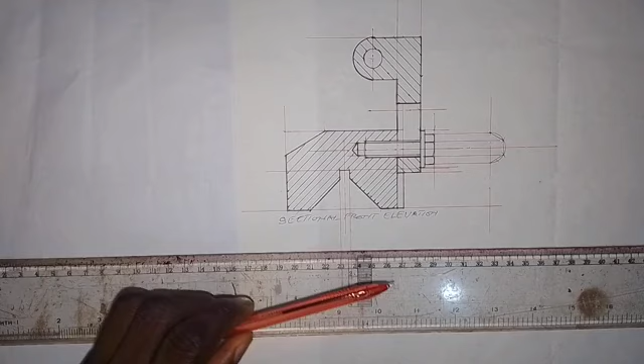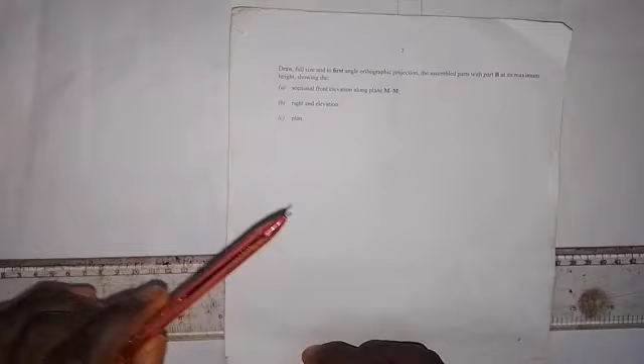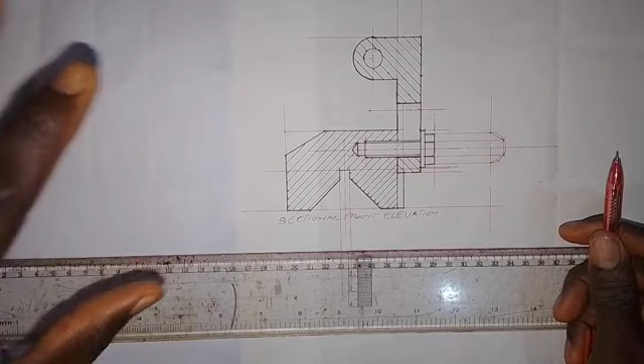Here we're going to be working on the construction of the right end elevation, as we have worked on the sectional front elevation in this mechanical drawing exercise. We are given the question asking us to draw the sectional front elevation along plane MM, which we have done. Now we want to work on the right end elevation, and we'll have another video for the plan. We'll place the right end elevation on the left side of the front elevation, as we are drawing the views in first angle orthographic projection.

So looking at the object in this direction, what we see here is what we are going to produce. This is how it goes, so let's work this way.

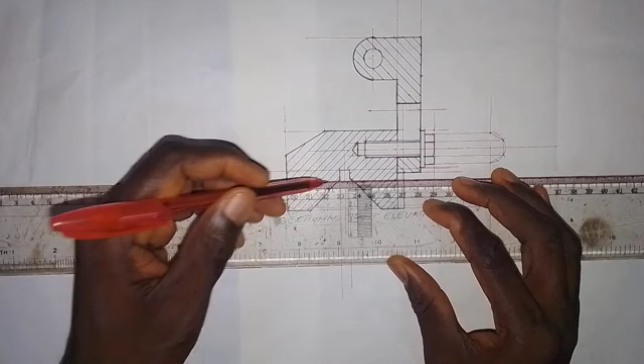First we are going to extend this horizontal line. Then I will come to this point here and draw a horizontal line from here to this side. Then I will come to this point up here and draw a horizontal line from here to this side. Then coming to this point, I will draw a horizontal line from here, and lastly at this point here I will draw a horizontal line.

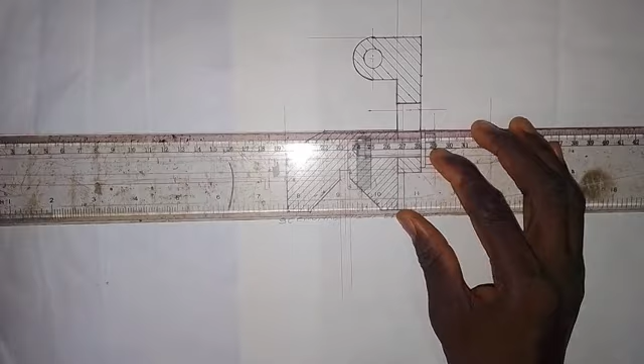Let's start first of all by getting the part of this particular component, before we add both the washer and also the adjustable vertical slide. So let's work on this part first.

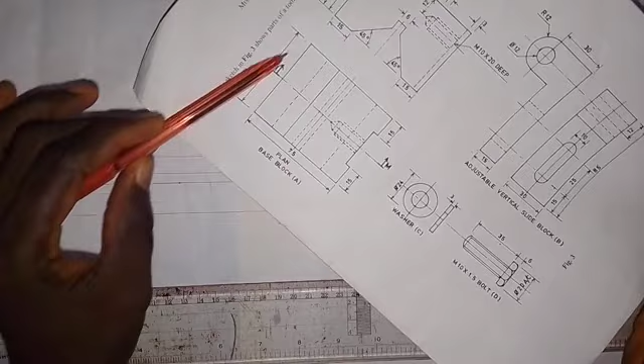Now, what is the length on the end elevation? Let's come to the plan here. The distance from here to here is 60 millimeters, so that's the distance we are going to make use of.

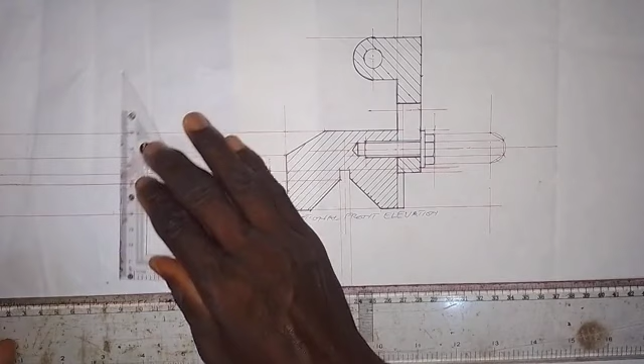I'm going to draw a vertical line moving away a little bit, so I will draw a vertical line here going down. Then I will come here and take a measurement of 60 millimeters, so this is 60 millimeters here. Then I'm going to draw another vertical line here also.

Alright, so with what we have here now, when I'm looking at it in this direction, I'm not going to see this - I will see a line at this point, just a straight line, and that is the line we have drawn here. So this line now, we make it a thick line from here to this end here.

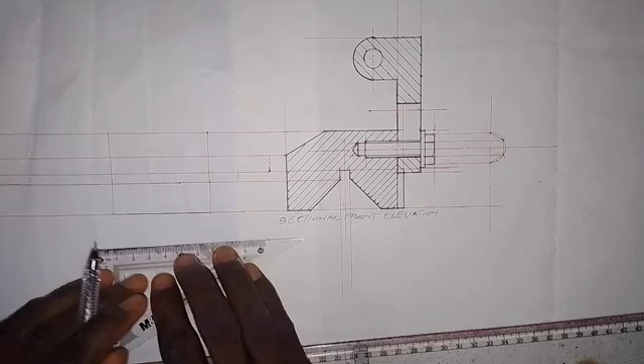Then a line at this point will be hidden from me, so we are going to make this line a short dashes line, like this. Short dashes line is used for hidden detail, so that will be hidden. And at this point, this will also be hidden from me, so we also make this one a short dashes line.

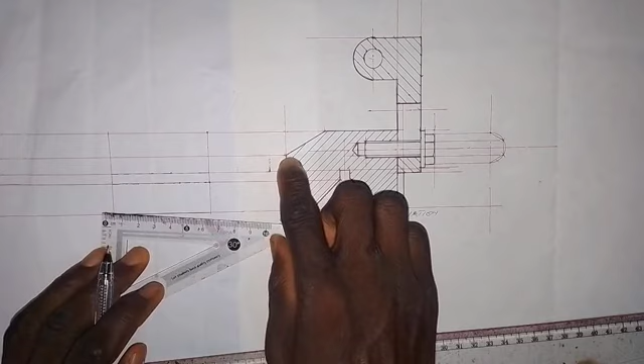Alright, so we have this. Then a line at this point will also be hidden from me, so we also make this line a short dashes line.

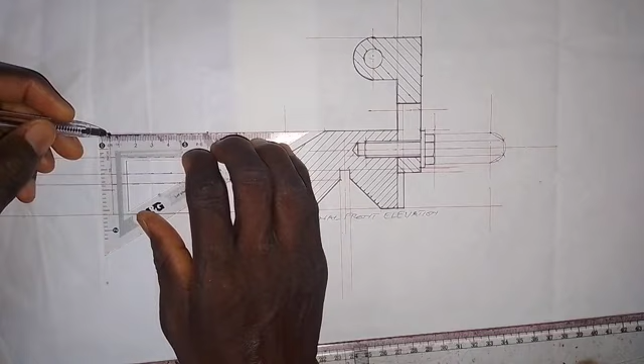Alright, so we have this. Then this line, I will see it as a straight line, so we see it as a straight line, it goes like this. And looking at what we have here, a part of it will be hidden - let's leave this one for now. So let's get the midpoint of the whole of this 60.

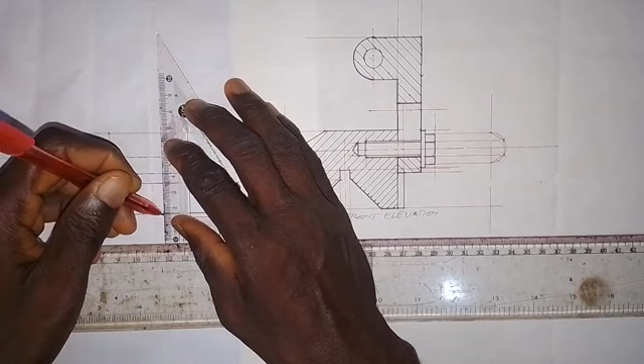Let's get the midpoint of the whole of this 60 so that we can bring this in. So this is 30, I'm going to draw a vertical line, a vertical center line up. Alright, so we have this now.

So coming here now, we need to get this point on the adjustable vertical slide. So we need to draw a horizontal line from here, so it goes like this. Okay, so we have it here.

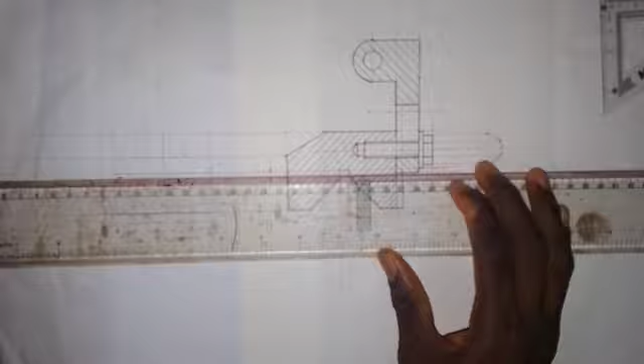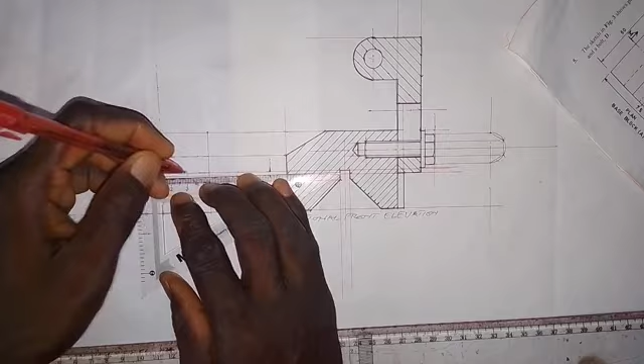Alright, so let's get the thickness, it is 30 millimeters in width. Its width is shown here in the end elevation of the adjustable vertical slide, it is 30 millimeters. So I will take 15 millimeters on this line, 15 millimeters to the left side, and also 15 millimeters to the right side to make it 30 millimeters. So I will draw a vertical line.

Coming to this point here, I'm going to draw a vertical line here. Okay, then coming to this point, I will draw a vertical line. Alright, so we have this now.

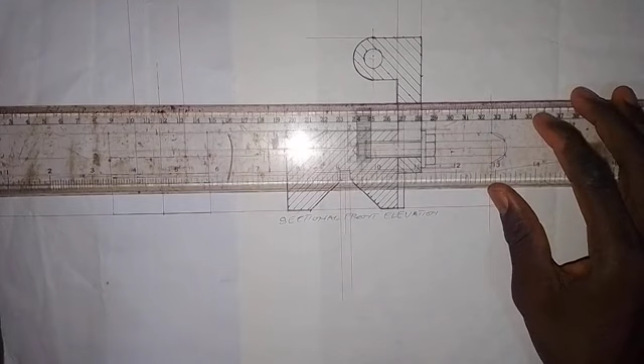So let's work on this part here. I'll come to this point here, and from here I will draw a horizontal line to this side, and then coming to this point, I will also draw a horizontal line. Then for this circle here, I will draw a horizontal line.

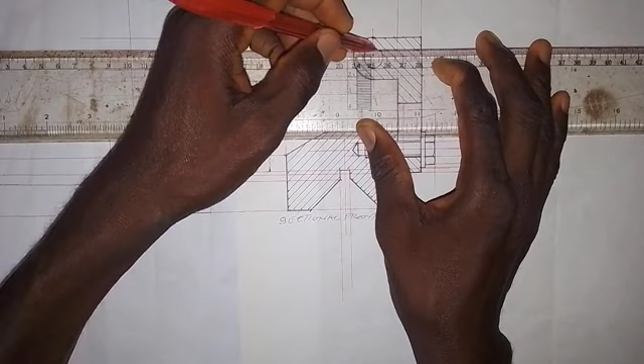So there's supposed to be a center line here, so we didn't put it there in the front elevation or sectional front elevation, so I put it now. And then we also draw a horizontal line at this point to this side. Alright, so we have this now.

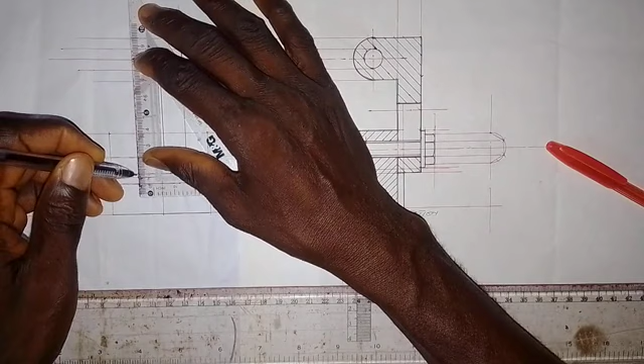So let's work on the part of the adjustable vertical slide that will be thick. So this line, from here up will be a thick line. Okay, and then on this side we also have the same thing, it will be a thick line. Alright, so then this line here will also be a thick line. And then coming up here, so this line will be a thick line from here to here.

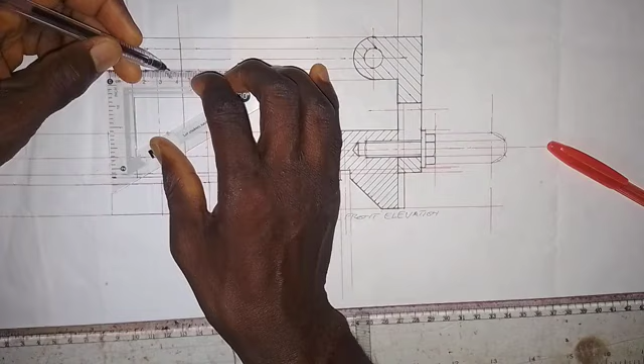And then so this will be a short dashes line for the circle that we see here. So it will be a hidden line, hidden detail of the adjustable vertical slide. So for the hole that we have there, we draw with short dashes line as I'm doing it here. So we have this now.

So then this line, there is a line at this point that will also be hidden. So we also draw it with short dashes line as we have here. Alright, so we have that.

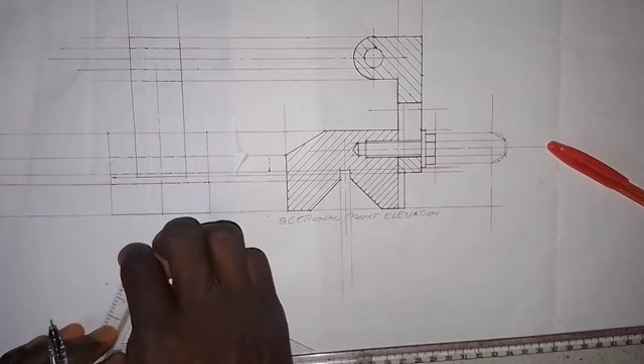So then the next thing that we are going to do here is let's create this part that we have here. So as we have it here, we already have the center. So this is the second center, the first center is here.

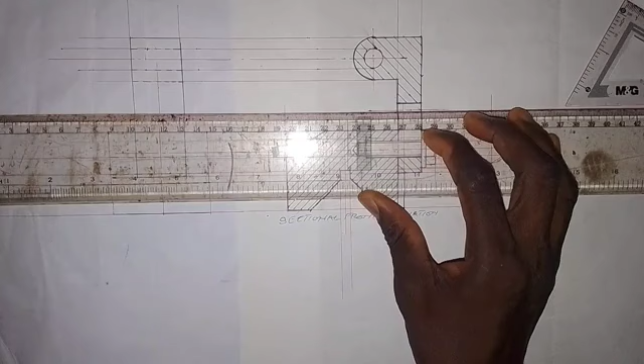So let's draw a line from the center line that we have here for this down one. So we draw this center line. Okay, alright, so we have this, and then we come here, so we also draw this center line. Alright, so we have this now.

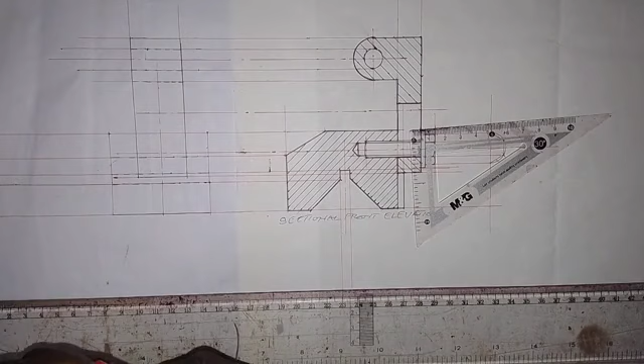So what we are to do now, the radius here is 5, diameter is 10 for this curve that we have here. So we take that 5, though it's a small radius, but we take that 5, so this is 5 millimeters. Okay, then we put at this point, so we gently draw the semicircle, so it goes like this.

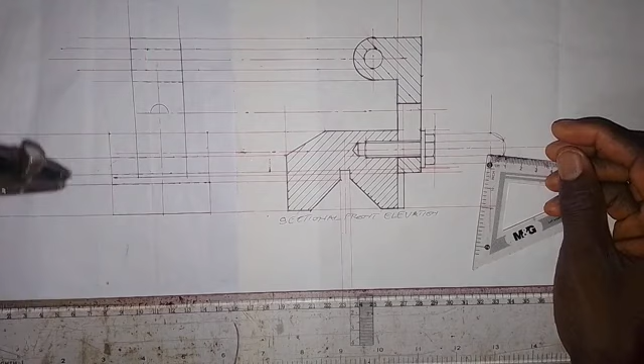All right, so we have it here, and there's one down here, but let's wait on that. Now we are going to draw a vertical line down from this point, and also a vertical line down from this other point.

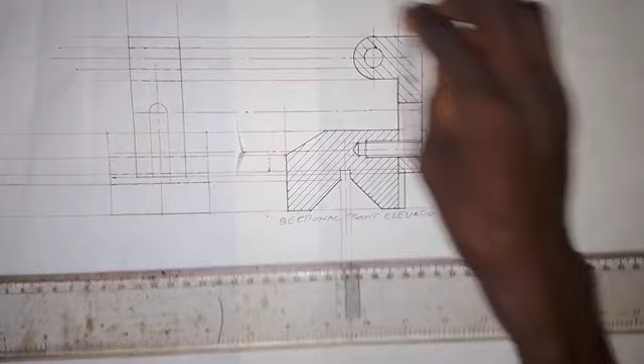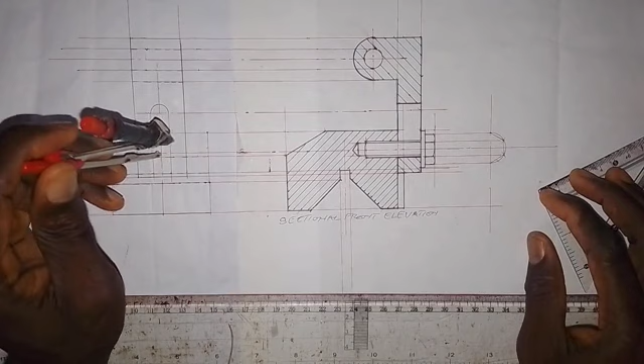So then we want to place the washer. The washer has a diameter of 24, so its radius is 12. It shares the same center as the bolt, so we take a measurement of 12 millimeters, place it at the center, and draw a complete circle. So we have this circle.

Okay, so this is how the washer, this is how its end will be.

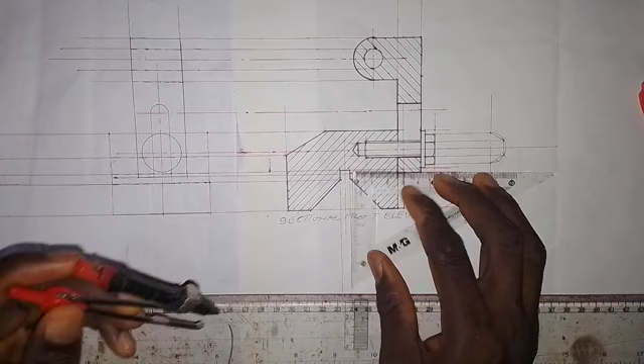And then for us to construct the hexagonal head of the bolt, the distance across corners is 20, so we take 10 millimeters, place it at this center, and draw a circle.

Having drawn the circle, we divide it into 6 equal parts. Put the pinpoint here, make an arc up here, an arc down on the circle, then putting at this point, make an arc up.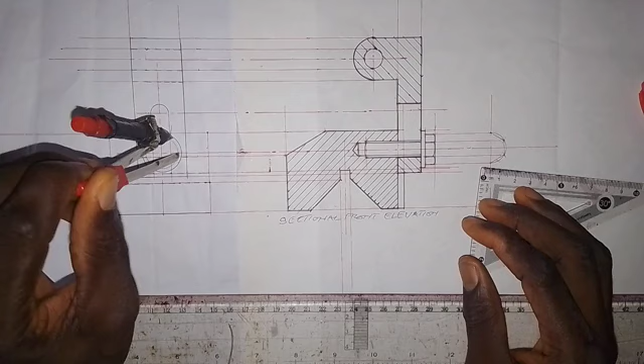So make an arc up here and an arc down here. Now we join these points together, joining this point with this point, and then we join these two points together to produce the hexagonal head of the bolt.

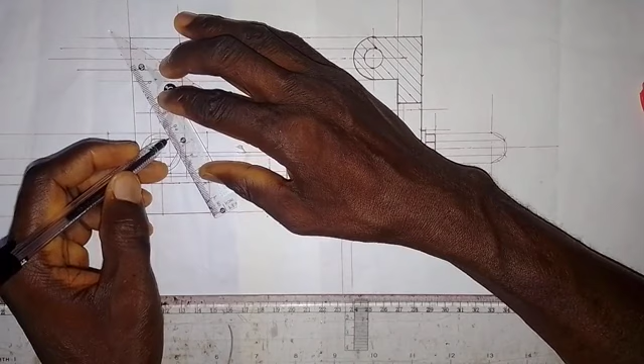So that is what we are doing here. We join these two points together, then come here and join these two points, and join these two points together as well. So we have the hexagonal head of the bolt in place.

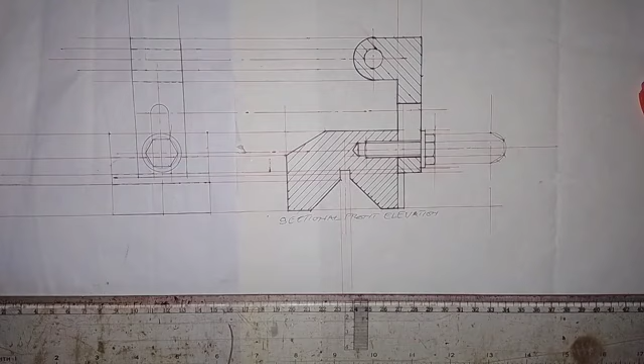So the next thing we do here, the thickness of the bolt is 10, so we take 5 millimeters and draw that circle with a 5mm radius. It's very small, so we need to manage drawing it.

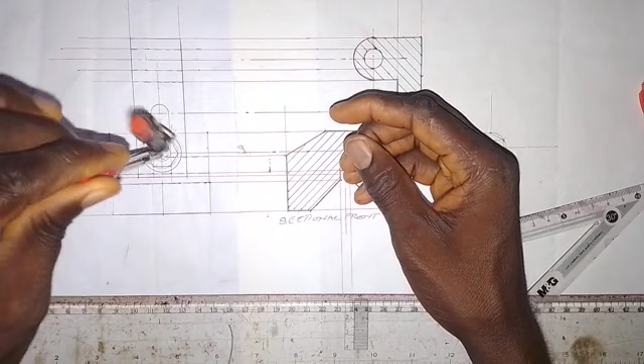All right, so we've been able to draw it. Then we draw a small one with radius 4, just managing to draw that also, though it is hidden. It should be drawn with short dashes, so I'll just leave it like this.

All right, so we are done with that part, we just leave it as it is. Now make this line a thick line, and also make this line a thick line here for the hole that we have here. And don't forget we are going to have a curve down here.

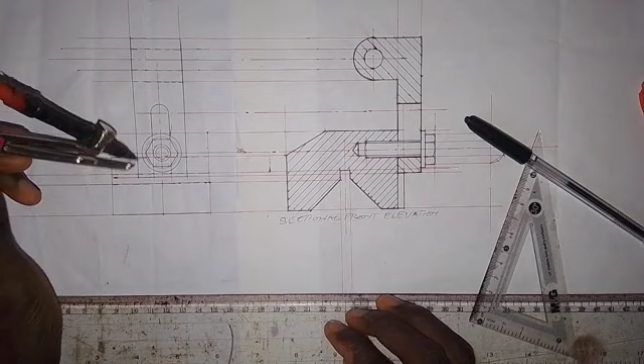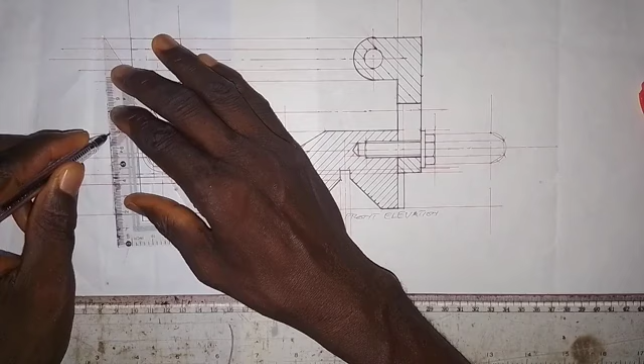So what else do we have to put here? Everything is in place. We just need to make this line a thick line from here down, and also make this line a thick line from here down. Then this line from here to here is a thick line, and this line is also a thick line.

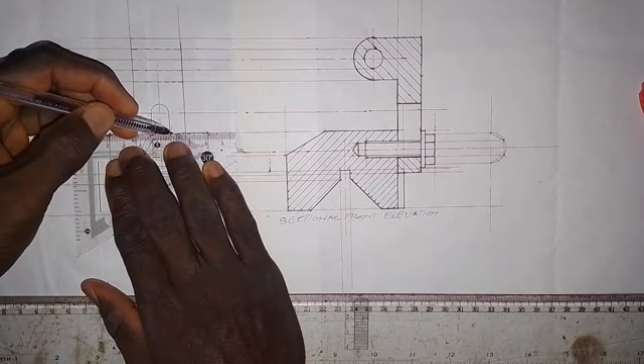The slide has covered this part, so we need to make it a short dashes line. Okay, so that is what we have here. This is the end elevation, the right end elevation. As we have the sectional front elevation, it's as simple as I've done it.